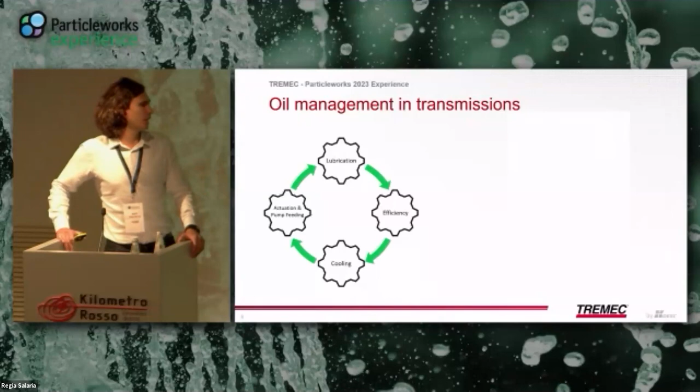Efficiency is important because of regulations like WLTP, but for high power applications, if we optimize the efficiency, we can reduce thermal losses and achieve, for example, very high speeds - meaning we can downsize or simplify the cooling circuit without requiring too high flow rates. The last point to close this cycle, since all these points are correlated, is actuation and pump feeding. We need a hydraulic circuit to activate and perform synchro shifts, or to distribute oil for cooling.

We need the pump, and it's challenging. For example, during high performance application, because of the high lateral G and longitudinal G, the oil will move within the gearbox, and there is high risk of exposing the inlet of the filter to the air, which can cause oil starvation or suction issues.

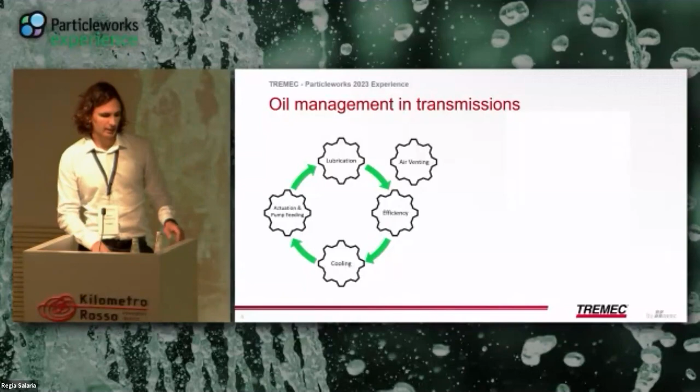Last point we need to take care of is air venting. Normally in gearboxes we have a breather or venting tube needed to balance the pressure inside and outside of the gearbox, keeping ambient pressure inside. How do we achieve all of this?

Normally the ideal cycle we like to follow to achieve those goals is to start with simulations, using Particleworks software. Once we are confident enough with the first concept, we move to the prototype stage, and normally we test on benches. The bench you see in that image is a very capable bench at Toyota Motorsport.

Why do I say very capable? Because it's capable of mimicking the angle of the oil inside the gearbox by tilting the gearbox along the pitch and roll axis. It can achieve very high angles and also with a very quick rate of change. You can also control the input speed up to 18,000 RPMs.

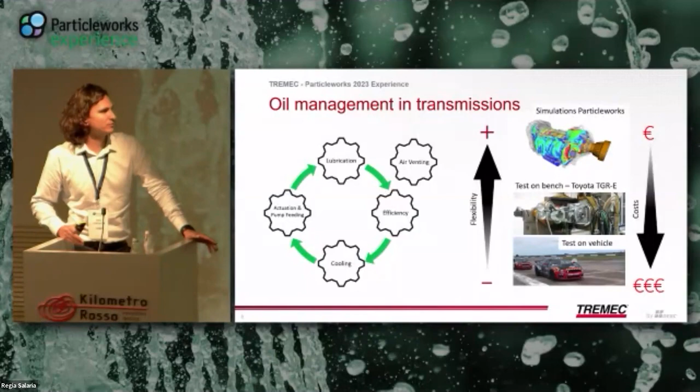And the last test, of course, when you are happy with the prototype, you normally start developing your product intent solution, and finally you test in the vehicle. As you see with the arrows, the best time to implement changes is during the simulation or concept phase—it's the cheapest and most flexible. Going to the last one, testing on the vehicle, it's very expensive, and you have almost no margin to implement changes during the test.

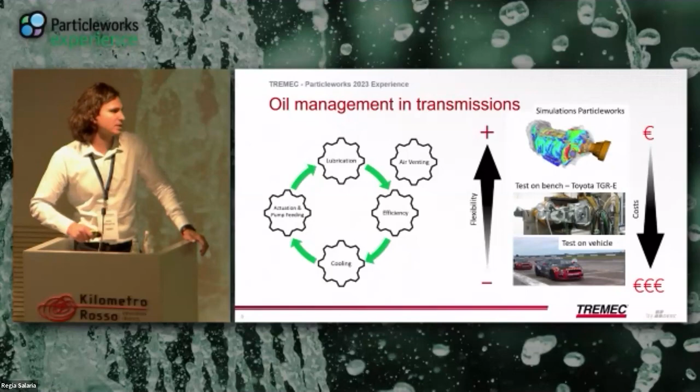For example, if you rent a track, you don't want to keep your car in the garage to change some parts, and also because sometimes it's very difficult or even impossible.

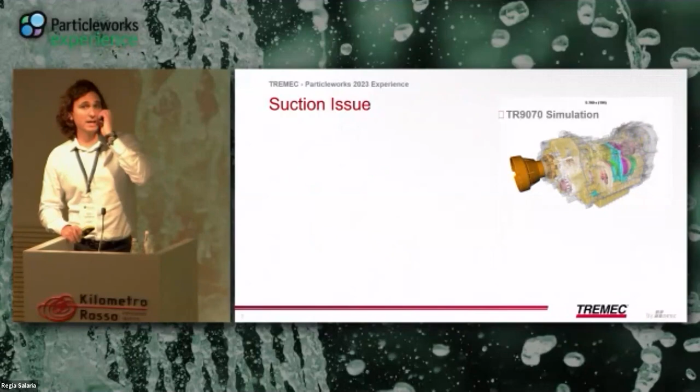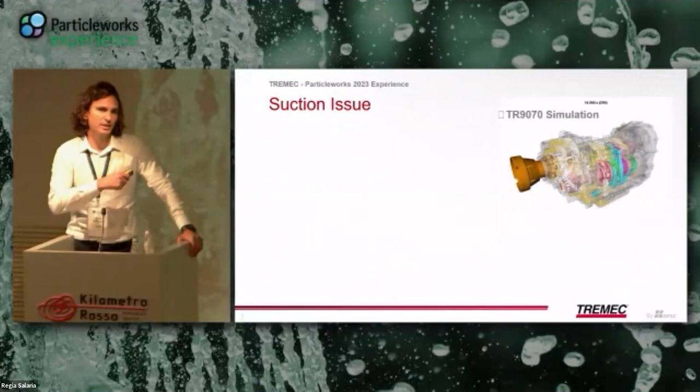So on the right, you already see a simulation. That's the TR9070 transmission. We'll start talking about the suction issue. You see a simulation of more or less the complete system. But actually, when we had this issue, we didn't have the software, and we were close to the production phase.

We found this issue during a track test at the Gingerman track. During a specific corner, because of the hard braking and cornering into the left, there was no oil reaching the inlet of the filter, and we were causing oil starvation. That was inducing a system pressure drop with a consequent loss of traction—we were not able to deliver power to the wheels.

At the time, we didn't have the software. We had a lot of pressure because we were close to production, and it was really difficult to find a solution because the slots on those benches are very few—sometimes you have one or two per year. Again, testing on track was really, really difficult.

That's why we decided to try Particleworks. Our goal was to simulate the same profile where we were having issues on track, including all the speeds of the rotating gears and the acceleration at the full system level.

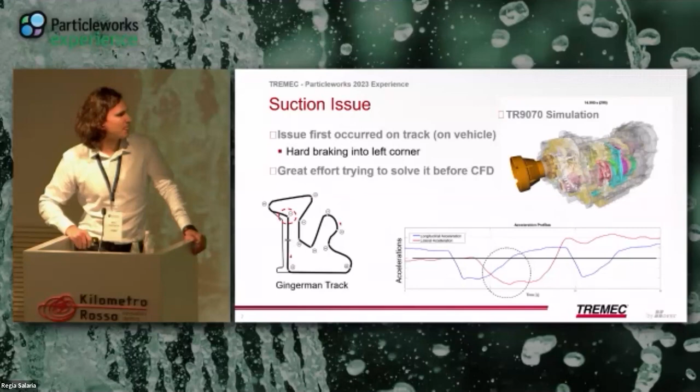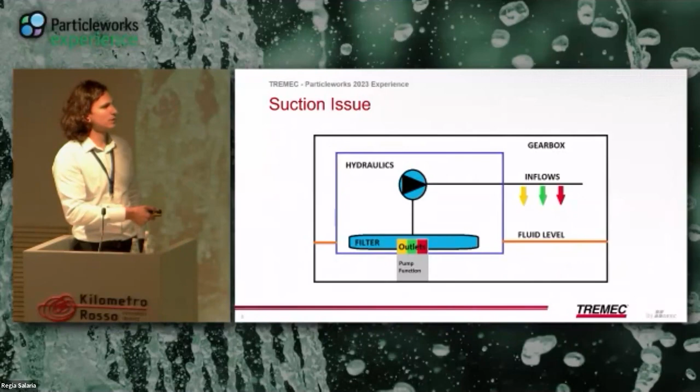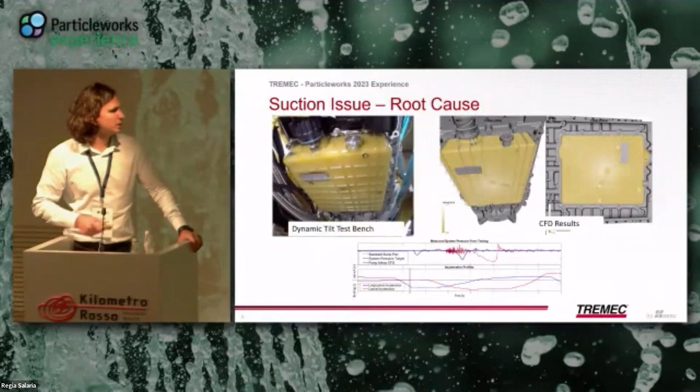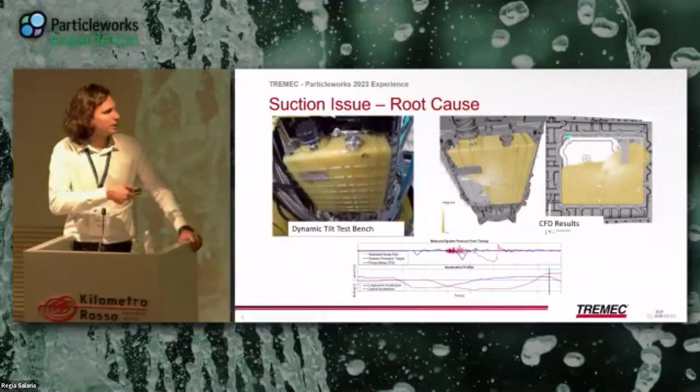What was happening is that during the hard braking and cornering to the left, the oil was moving along the surface of the sump and was leaving the inlet of the filter exposed to the air, and this was causing the suction issue. The red line we see here is the measured system pressure during the test. What we see is some system pressure oscillations followed by a big pressure dip, and this was causing the clutches to open.

We had a good correlation from a qualitative point of view between the simulations and the test. Of course, in the test we have some oil films not caught by the simulations, but if you look at the oil distribution, for example this angle and this angle, it's more or less the same.

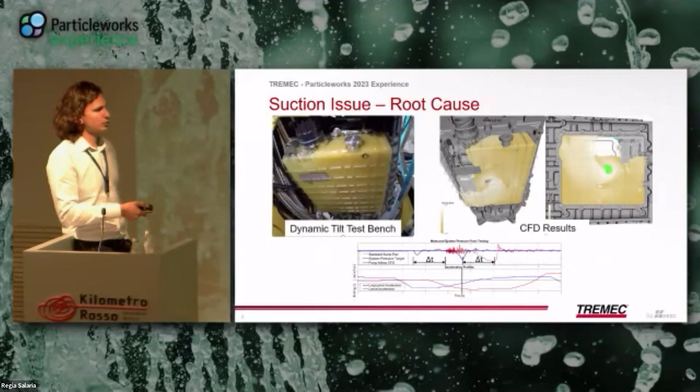Another quantitative correlation we had is between the flow rate measurement in the CFD simulation and the system pressure drop. In both cases we have two drops, a small dip followed by a deeper one. The only thing is there's a delay in time between the two, but it's also true that the flow rate measurement is at the inlet of the filter, while the pressure drop is measured downstream in the hydraulic circuit.

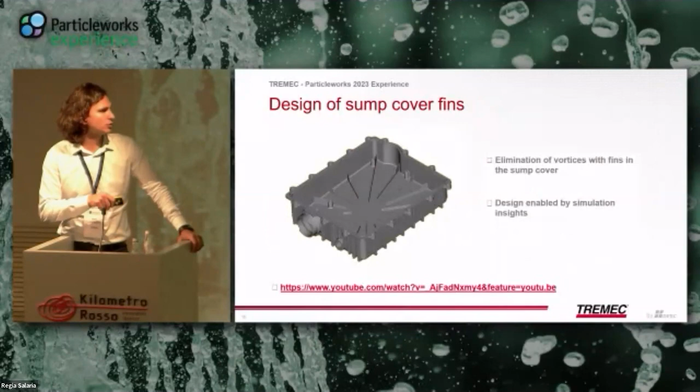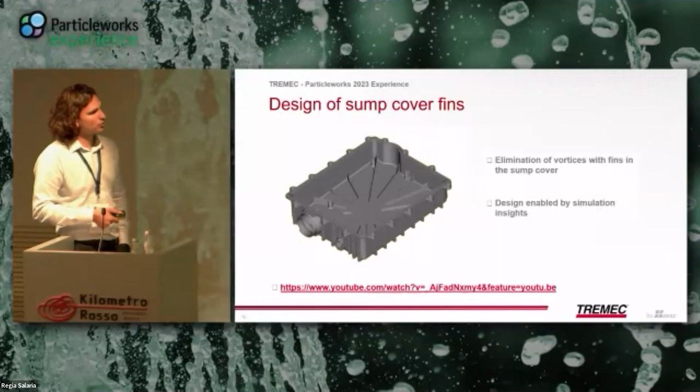So what did we do to solve this issue? Again, we were close to production and didn't have a lot of time to implement big changes, so we focused on the sump pan. The idea was to introduce some fins, trying to force the oil to stay close to the center of the pickup, where the pickup location is. We did some optimizations of these fins, tested different configurations, and in the end this was the best configuration, not too close to the inlet of the filter. There is some margin.

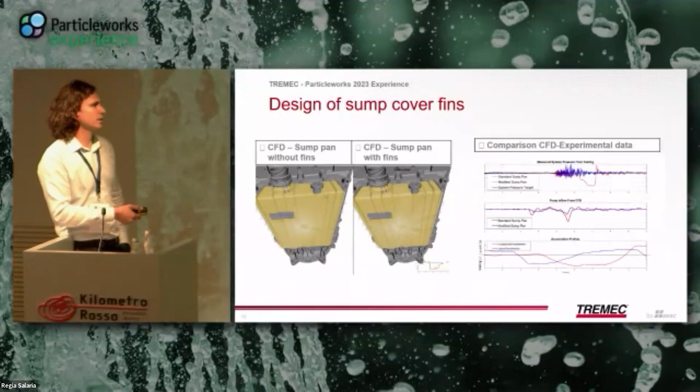And here we have a comparison. Unfortunately I don't have a picture with a transparent sump with fins, but here on the left we have the sump pan without fins in CFD, and here is a sump pan with the fins, still in CFD.

Immediately switching to this configuration, it's clearly visible that the fins are helping in keeping the oil close to the center. This kind of swirling motion is reduced, and it was verified on the bench.

So in this case, these are both system pressure measurements on the bench. The blue one is the case with the fins, and this big dip that we had before now disappeared. Same as in CFD, the blue line is the solution with the fins. We still had two small drops, but more or less the same in magnitude. The second big dip that was causing the clutches to open was solved.

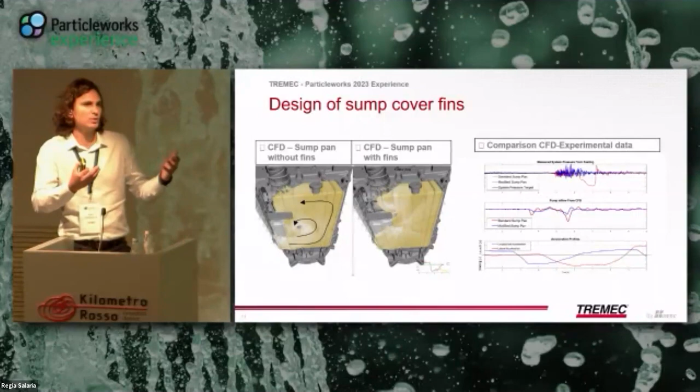This is how we solved it, and we were very happy because until that moment the gearbox for us was kind of a black box. We were not able to visualize what was happening.

The second test case is related to the TR9080, and I call it oil expulsion. Here we have the breather, and the oil was coming out of the breather. The main difference between this test case and the one before is that in this condition, actually we found the issue first during the simulation.

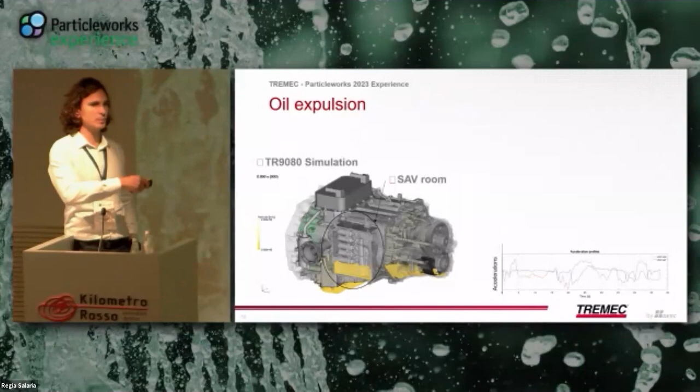In this case we were still during the concept phase, and we were able to spot the issue, spot the criticalities in the gearbox, prepare for the next tests, and already implement a solution and validate it.

As we see from the bottom here, we have again a track profile. It was a quite demanding one, and also very long.

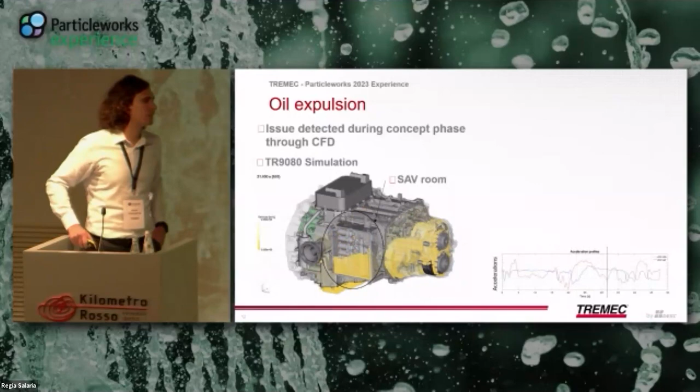One of the greatest values we found in Particleworks was that we were capable of simulating almost 48 seconds in 5 days and obtaining results. At the time for us, it was, I would say, great, and we could perform many different iterations.

For this specific case, to give you some values, it was about 1.3 million particles. Particle size was 2 millimeters, so we had at least 5 particles per passage. We also did some refinements and particle size sensitivity studies, but 2 millimeters was working fine for this kind of application and mostly for the oil motion.

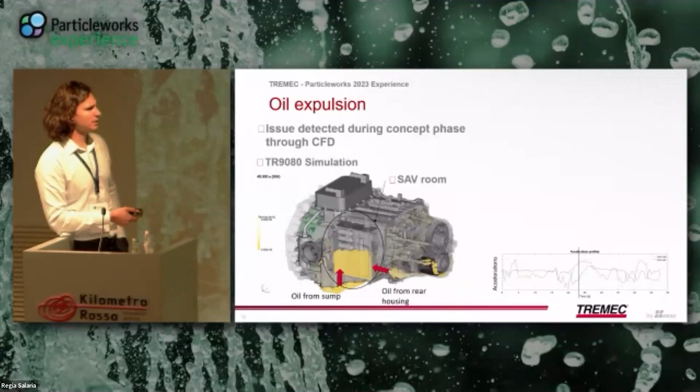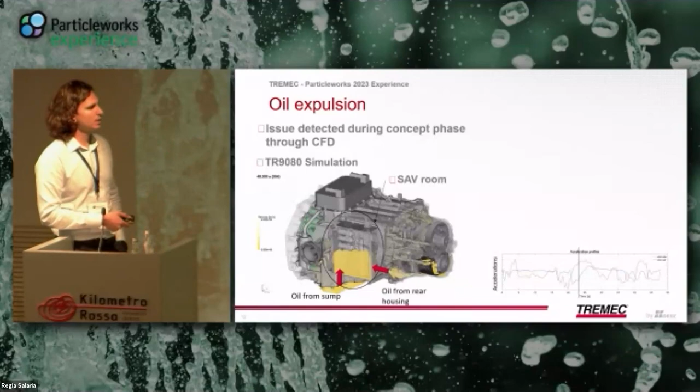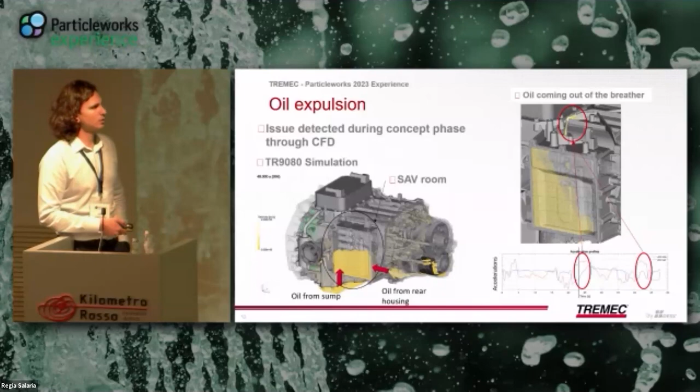So what was happening in this case: here we have the SAV room, where we have the actuation valves. The SAV room was connected to the sump pan and to the rear housing by 2 passages. The oil was going in during some conditions, and eventually during severe braking it was coming out of the breather. That's really risky if it happens in the car, because the car can catch fire.

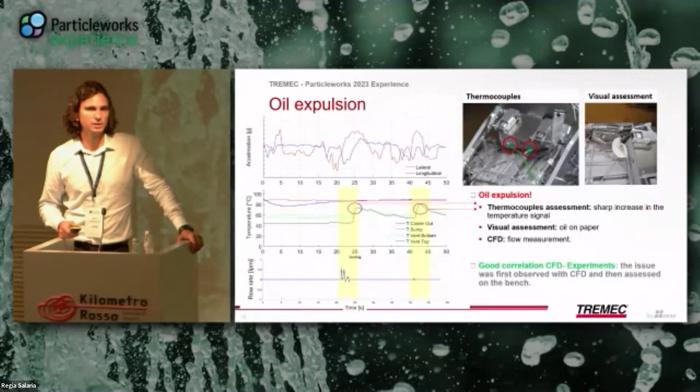And here we have the validation with the test results. So what we see here is again the profile, and here we have some temperature measurements. The idea was: we had a plastic tube connected to the breather with 2 thermocouples. When the oil was coming out, the 2 thermocouples measured a spike, an increase in temperature.

While here we have the flow rate measured in CFD. And in this case, although it's a very long maneuver, there is a very good correlation between the CFD and the test results. They are almost on spot.

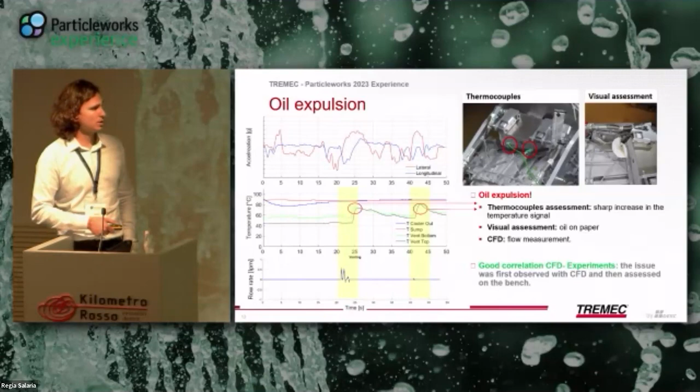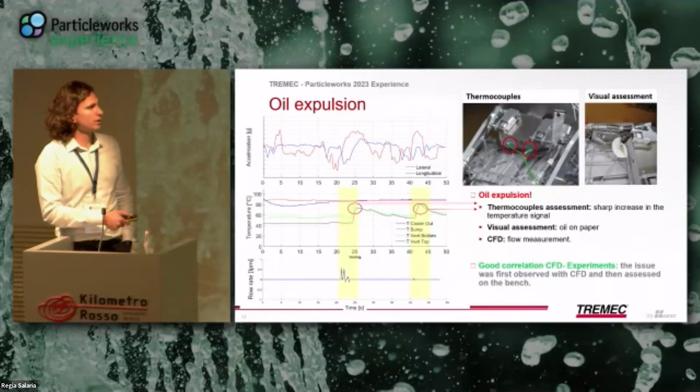Again, there are just some delays in this temperature measurement, but the thermocouples are downstream of the location where we measure the flow rate and the oil coming out. Then also visual assessment, you can clearly see the oil on the paper, so very good agreement for a very long maneuver.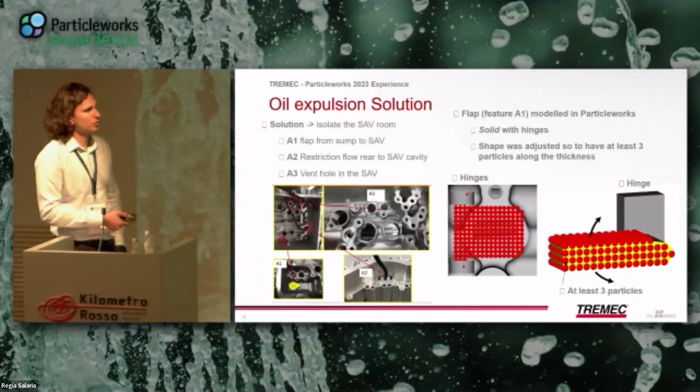Normally this is a deformable piece, a rubber piece, and we had to introduce some simplifications. So what we did, we simulated it as a solid body in Particleworks. We added some hinges, and in order to use this modelization, we need to rework the geometry to have at least 3 particles along the thickness. So this part can rotate along this axis, and it worked fine for us in the simulation.

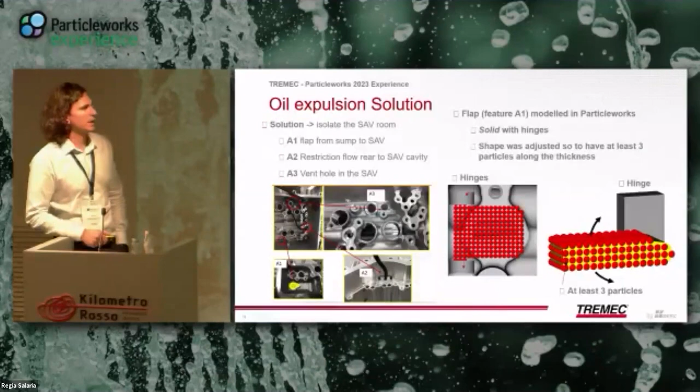In the other solution, the passage to the rear was completely sealed, and since in the SAV room we had the breather, we needed to add an extra air passage, that is feature A3. And here you can see the bench in action. It's quite extreme. This is again at Toyota.

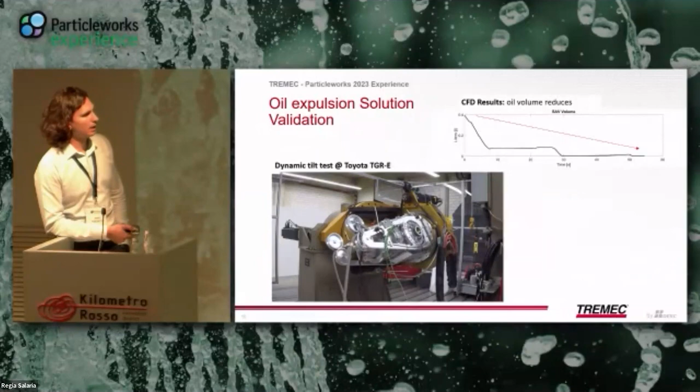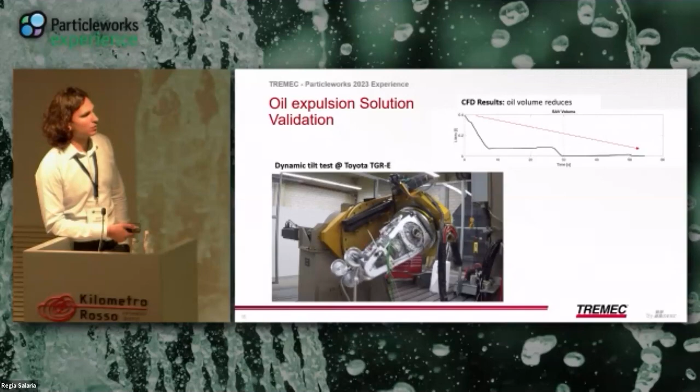Correlation was again really good. I don't have a video of a transparent feature on this side, but in CFD, what happened is that the oil level in the SAV room decreased and went almost to zero. And then we did also the verification with the thermocouples and with the paper, and as you can see, there was no oil in there.

So as a conclusion, what I can say is that since we introduced the software, there was a massive difference in our routine. For the first issue, the suction issue, we were spending almost 5 months trying to solve it without succeeding. Then, since we ran the first simulation in 1 month, we had an idea of a possible solution. The time to prototype it, test it, and the issue was gone.

Since then, we always use it during the initial phase of new concept development, and we always had very good correlation in terms of oil displacement within the gearbox compared to the test. Normally we run simulations of about 1 to 5 days. Particle size can range from 2 millimeters to 0.1 millimeters depending on the application, and it really helps us in spotting the critical areas inside of the gearbox.

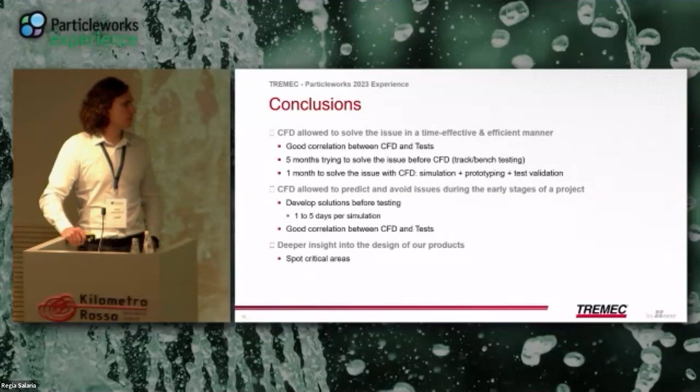Just to give you some extra comments, for us the next goal will be to focus on churning losses prediction and heat transfer prediction, same as the presentation we saw today. I think that's all from my side. If you have any questions, feel free to ask. Thanks.

Thanks for the presentation. The question is, how do you specify the breather itself, the breather part? Do you have the breather opening modeled? How do you specify it in the model? It's just a pure connection to the breather domain. The opening is just a pure opening, yes, the particles were able to potentially leave the simulation. I didn't specify further measurements. In this case, they were both single phase simulations, so just one phase, just the oil.